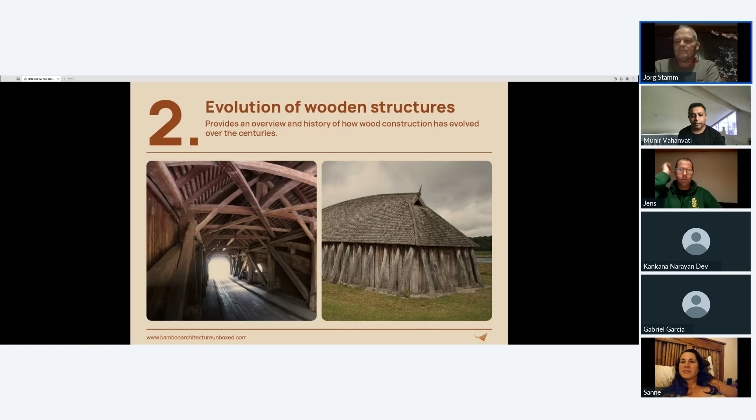Okay, thanks, Jorg. The next chapter is, hopefully you can see the next slide. So this is where we go into this idea of material specific design and architecture, and this concept of the need for out of box thinking. That was kind of the underlying principle of how we started thinking about the book: what makes bamboo architecture specific or different from other materials.

And one of the things we discuss in the book is that a lot of the different buildings over time have been influenced by the qualities of the materials. So when you are building with stone, you get a certain type of architecture because the material has certain limits, in the sense that it's heavy, you can't have big spans, you have small windows, you can't have big openings, those kind of things. Then when you move to other materials like timber, it allows different characteristics and expression. And when you move to, let's say, brick, it shapes its own style of architecture and own possibilities.

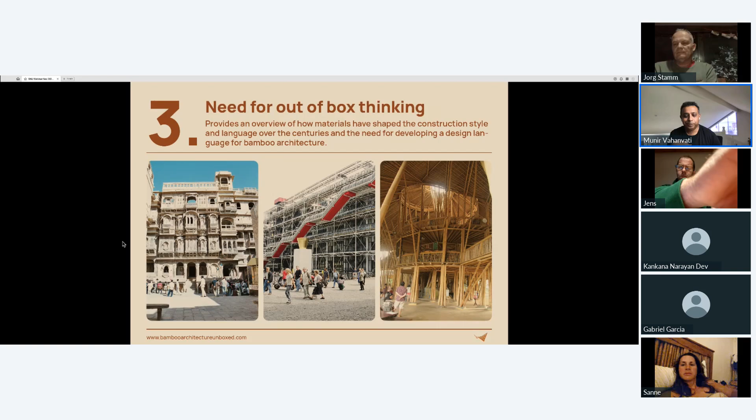Jorg? Go ahead. Yeah, awesome. Thank you. We keep moving.

So that's when we start then looking at geometry and how that influences design. So a lot of the times, some of the very funky bamboo architecture might look chaotic, but there are underlying geometric principles that influence that design. So although it might look random, the geometry is what actually gives it structure. That's what gives it stability. And that's what provides its strength as well.

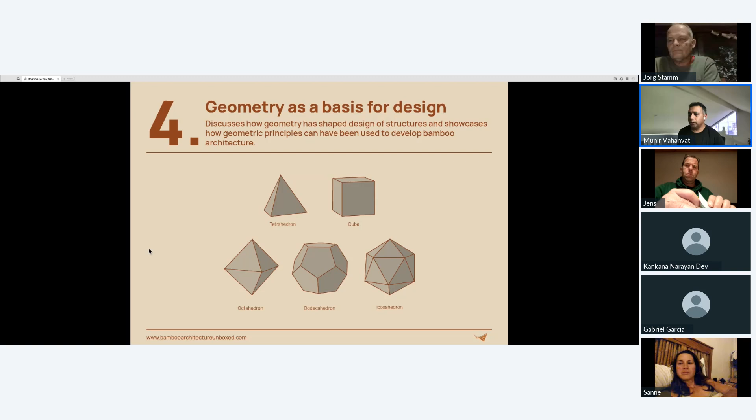Thanks, Jorg. So yeah, that forms the basis of pretty much the next part of the book. And before we go into the detail for the geometries, I guess we talk a little bit about the design tools. And this is an important aspect as well. If anyone's working in a design field, you would know that you go through different stages of exploration of design.

So there are a lot of different aspects, and you might start with a sketch, and then you do a bit of a drawing, slightly formal drawing, and then you might build a model with the hands, with bamboo. I think bamboo skewers are the most popular choice to build different models. And then you would go into some of the more advanced software like Rhino and Grasshopper. So this section talks about the different tools that you would use to develop designs and the pros and cons and benefits.

But it also shares some insights from one of the workshops that I did with Jorg and organized by the Architecture School in London, in Panama, from London but in collaboration with Panama. And it was focused on Rhino and Grasshopper, and some of the learnings from there around how design tools can influence design.

And it's quite an important aspect: when you build with a model, that you're building with bamboo skewers, it will shape your design in a certain manner because you can do certain things. Whereas when you do these things in Rhino, it will shape certain directions. But a lot of these complex softwares allow for pushing the boundaries that were not possible before when you are using bamboo. So especially Rhino and Grasshopper have been quite useful in developing designs which are more organic and free form, but also geometric and based on those principles.

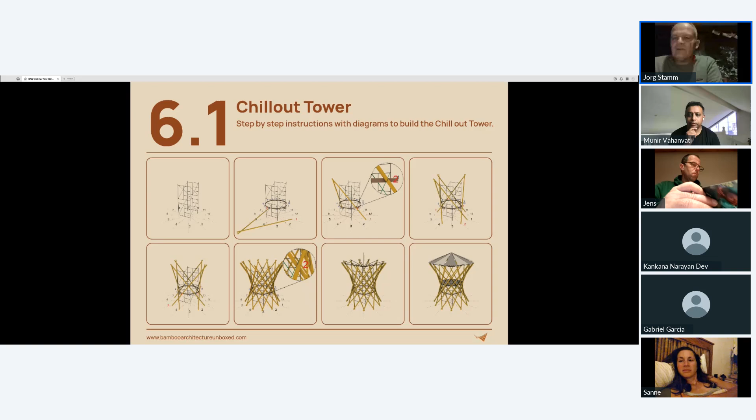Maybe you play with your kids, you do a tiny little tower, like a 2-meter or 3-meter tower with Phyllostachys aurea, the fishing rod bamboo, for example. So in the beginning, it's good you just play around, and this book gives you the sequence, so you can do it with small sticks, then you choose thicker poles, then longer poles, and over time you get experience, and you understand on the way the logic of the

structural concepts, because this book presents different structural concepts, and that's why we can work with all kinds of different bamboo sizes. We don't always have to have strong poles in the 4 corners. We can use smaller poles and create very stable grid structures that hold together, because there are dozens of poles, each assuming a little bit of load, and as they cross each other, they are very stable.

So I'm trying to get the architect or the reader of the book or the builder, I'm trying to catch them and get them into more and more complex structures. And thanks to the skills in Rhino and Grasshopper that Munir adds, we could make these very beautiful drawings, and the whole book is very didactical.

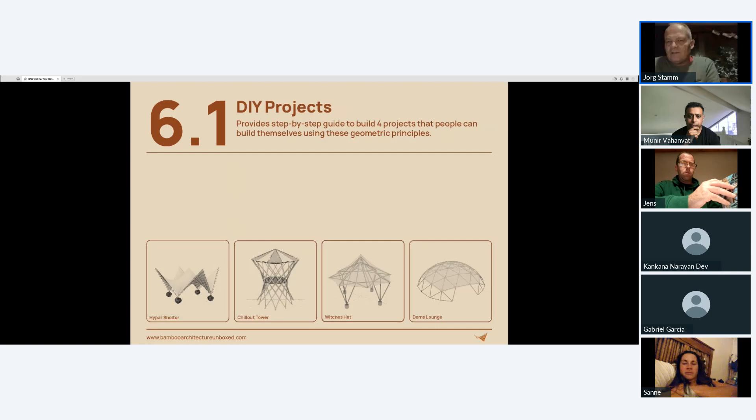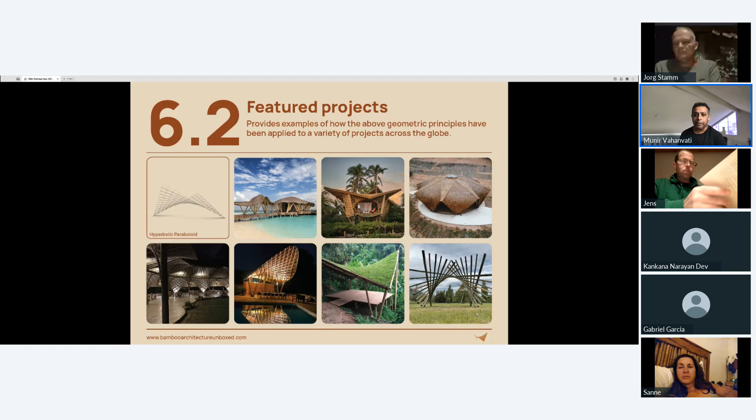So this is a snapshot and a collection of how the hyperbolic paraboloid, a simple shape, can be used in so many different ways. What we're trying to illustrate is that although it might be a very simple geometric principle, the only limit is your imagination in how you can use it to combine lots of different things. Jorg and I have done a lot of different versions of it, and many other versions are still possible. So it's a start of something that can keep going in so many ways.

Then we go through each of the principles. To you, it's basically an invitation. You pick up where we leave it. Yeah, we gave this book basically to you, so you have the basis. You can understand.

When I started at Green School together with John Hardy, with Orin, with Elora to build these amazing structures, we did workshops there. We taught other participants how to do those concepts in a sound way, so they don't move, they don't break, the bridges don't collapse. So it's very important. I did more than 100 workshops. I think more than 2,000 students have learned over time how to do things right. And we wanted to document all this and bring it to you. So now you take it from here and please bring it to the next level.

Great. So, moving on with the next set of examples with the hyperboloids. And this is something that's always fascinated me the most. It can be a building, it can be a tower, it can be a bridge, it can be so many things. It's such an amazing geometry. And we have here some of the examples. These are some of the photos of some of the projects in the book. There are many more projects, but for this presentation, to keep things simple, we've just highlighted a few.

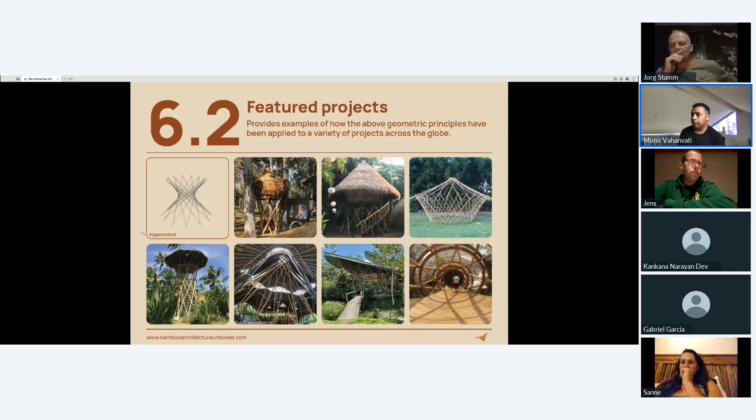Jorg, do you want to add anything to that? Oh, go ahead. Time is running. 15 minutes left. Yeah. No, that's fine. I think we are almost at the end, so it is pretty good.

The tetrahedron is another opportunity in itself, and it kind of lends into that space frame kind of structure, where you can use the geometry to create structures which are more geometric but very stable. And Jorg's done a fair bit of exploration when it comes to tetrahedrons and using that as a geometry. One of them is used as a project in there. This was done in Mexico with, can you remind me, Jorg, the tunnel? It's Lucila Aguilar in Mexico. The one before is in Panama. It was a jazz festival in Panama with Geoversity.

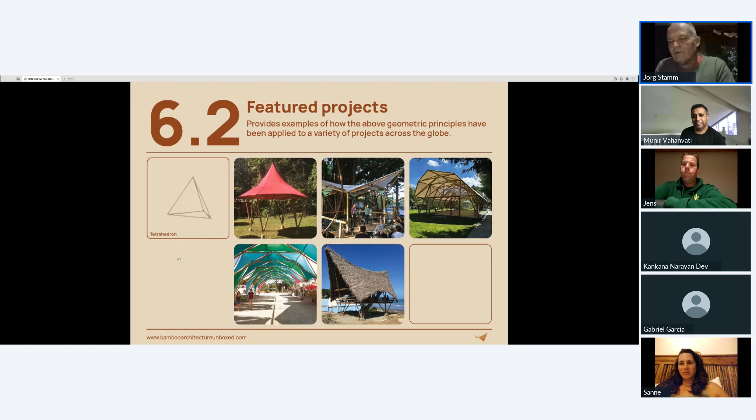The blue one below is a reconstruction workshop after the earthquake in Ecuador. We created something we called the chief's hut, the Casa del Cacique, which means the chief's house. And the greenish one is with Cave Urban in Sydney. We tried to create some tunnels that can be used at festivals, to avoid the plain sun for the participants. So there's a lot of funny structures, very easy, very quick to build, and they have a logical base, which is the tetrahedron, extremely stable, just 4 corners, 4 screws, and the whole thing becomes the structure. 6 sticks, 4 screws, and 4 surfaces. That's a tetrahedron. That's it. Can't get simpler.

And the last, and now this is your world. This is a lot of my world, yes. So the last principle is the geodesics, and geodesic domes don't need any introduction. Obviously, Buckminster Fuller pioneered the geodesic domes and created a lot of amazing geometries and domes with that. What we do is use that principle to build and show examples of structures and how they can be built. A lot of the pointy Zome stuff was done by us as part of a few structures in schools, and now we sell it as a Zome building kit, a flat pack kit that people can easily purchase and build. There is a small Zome cubby house as well that we have developed as part of that.

Lucila Aguilar used some similar principles to do this installation in Mexico as well, and you can see another couple of geodesic dome examples. But this is only a start because

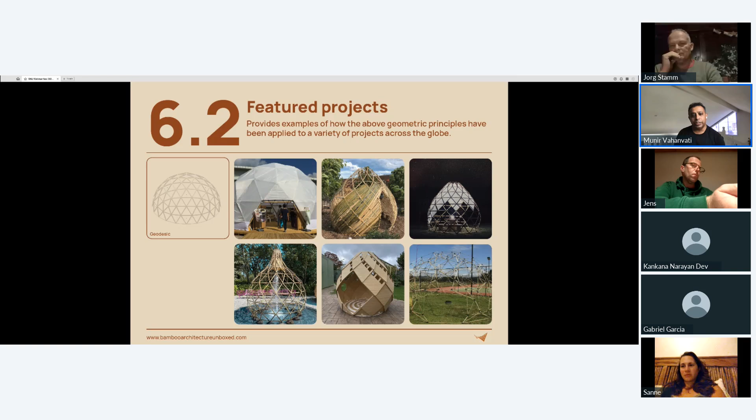So that's the bit on the geometric principles, and I think there are lots of images and inspiration in the book for you to look at and explore. There's a lot of detail around who designed them, and some of the principles and ideas behind it as well.

And the last chapter is what Jorg mentioned earlier. It's a concluding chapter, which is an invitation for everyone to take this further, to use these geometric principles and actually get on building. Because we truly believe that the best way to learn anything about bamboo is to actually start building. The book can only do so much, and you can read in the book, you can see in the book, but to truly learn, you need to start building.

Yeah, Jorg, you could say basically, instead of just do it, just boo it. Just boo it. Yeah, maybe that's something we should start. Good one. Good title for the next book. As long as Nike doesn't sue us afterwards for infringing on some of their copyrights.

Yeah, no, that sounds good. So now let's boo from it. Just boo it.

The thing is, basically, we are launching this book. Well, the first exemplars have been arriving recently, but since then I have already 500 books sold. You still have 500 books at home. You can ship them, and then we have to make sure we have enough money for the reprint.